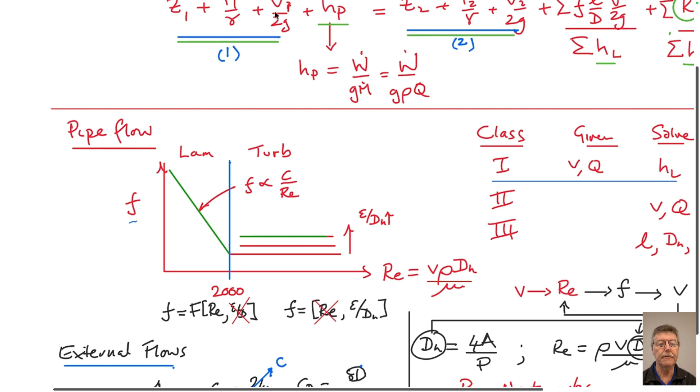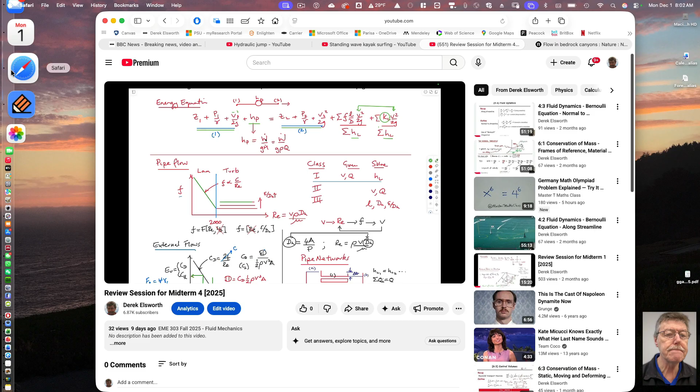All right, we were surfing West Virginia, and our very last topic—perhaps we can review things from the last little while—is open channel flows. The deal with open channel flows is that unlike pipe flows, which completely fill the section of the pipe and are constrained to that volume, and external flows, which completely envelope the structure they surround, open channel flows have one free parameter: the depth of the channel. That's the reason why, when we look at surfing West Virginia, you get this weird and wonderful behavior with these waves in the channel at very high flow rates.

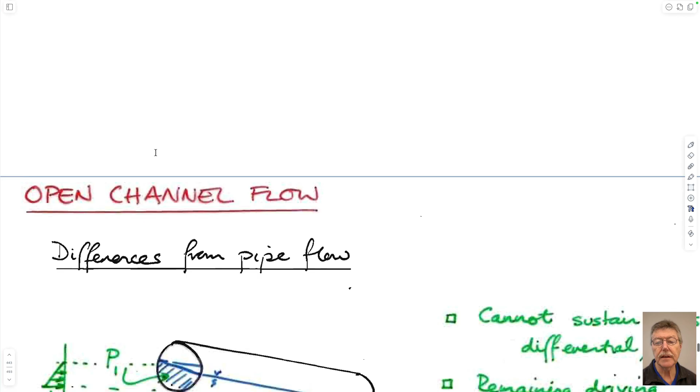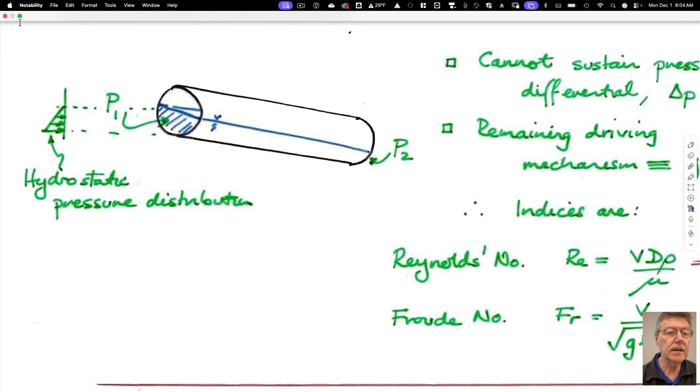If you don't constrain the flow to completely fill the cross section, then it could be a very shallow flow, flowing very quickly, or a very deep flow downstream, flowing very slowly. Why don't we look at that—this is the previous example here, this is exactly what this is.

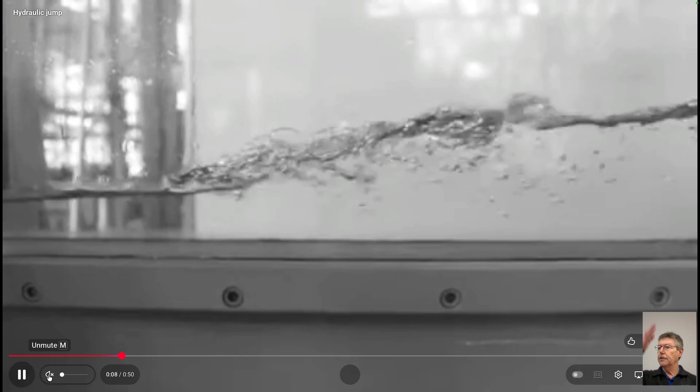A hydraulic jump is when it jumps from being exactly that. On the left-hand side, if you cut this anywhere along its length, the flow rate across that section has to be the same from continuity requirements—Q upstream has to equal Q downstream because it's not accumulating anywhere. So if you cut it upstream, it's a very shallow flow depth, a very small cross-sectional area. The velocity times area there has to equal the velocity times area downstream. So on the left it has to be flowing quickly, and on the right—let me check the orientation—it's flowing very slowly and at a deeper depth.

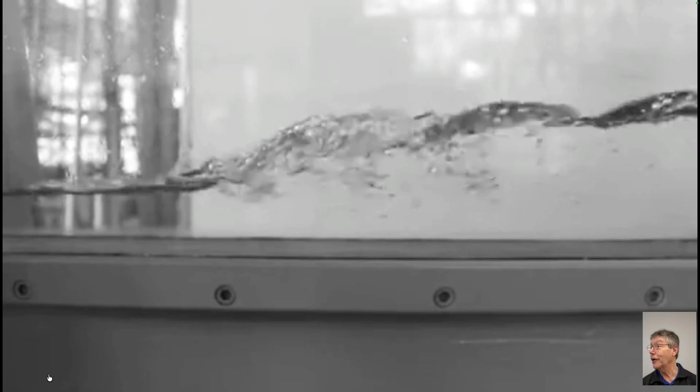That's the issue for open channel flows: you can have each of those modalities that the water gets to choose between. It can choose between going quickly at shallow depth, or more slowly at a deeper depth. That's some of what we'll talk about in this last week or so, the last 3 classes.

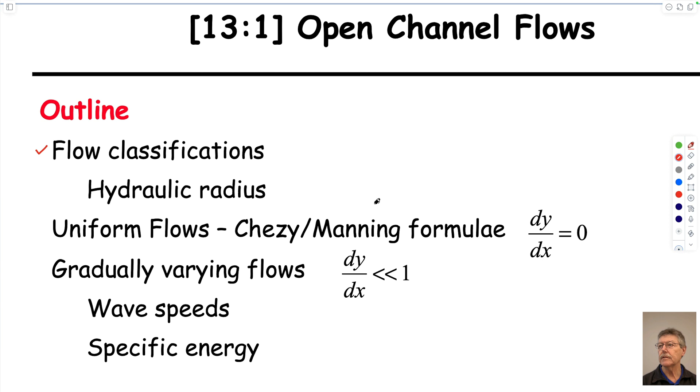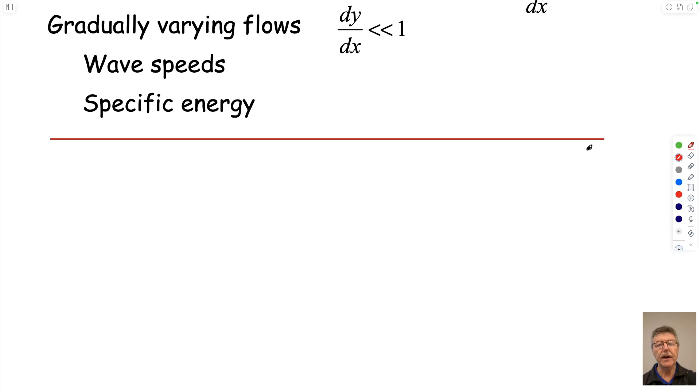But before we do that, let's catch our breath and look at what is the same in what we've done so far, for pipe flow. I'm going to draw something on the left-hand side which is tall, which you'll see—I'll pre-draw it perhaps. I'm going to draw something like this: our Moody charts, essentially.

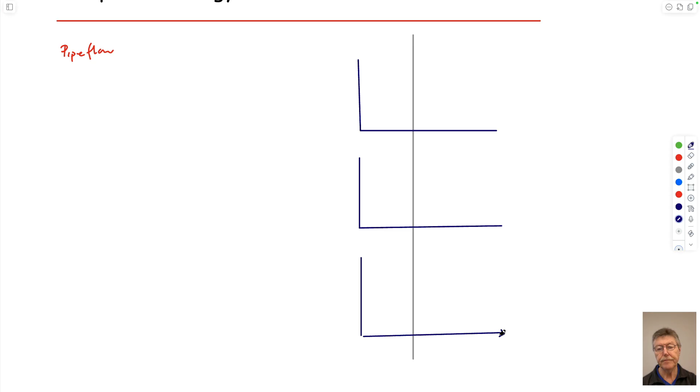I'm going to draw 3 of them: one for pipe flows, one for external flows, and then one for open channel flows, just to identify everything in the same space. This is the boundary between turbulent and laminar.

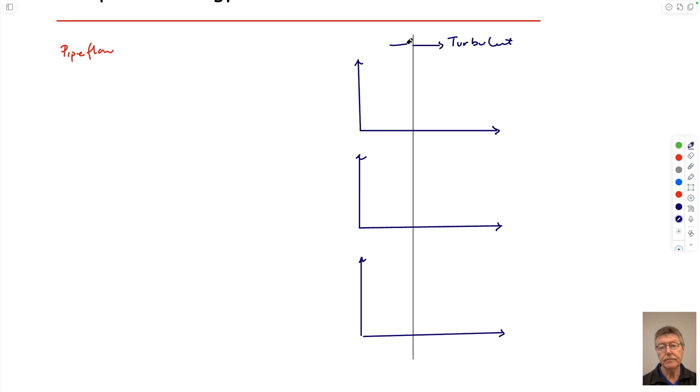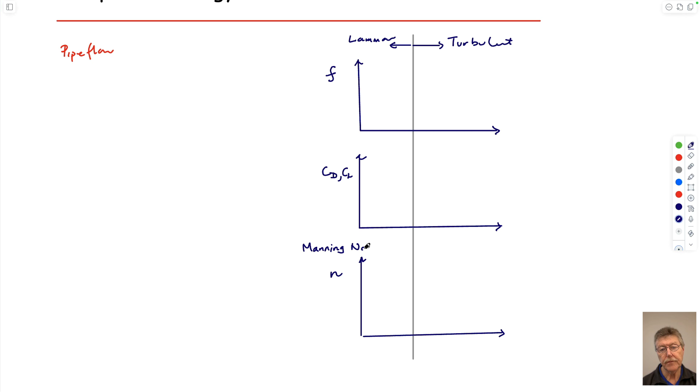How's my writing? This is friction factor. This is drag coefficient or lift coefficient. And this is Manning number, which we haven't talked about. This is Reynolds number in each case. We know that Reynolds number equals velocity times density times a characteristic dimension, the hydraulic diameter, divided by viscosity. It's the same for each of these.

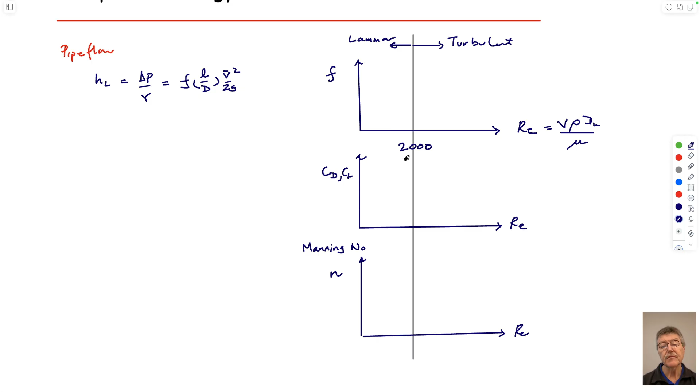We know that, for instance, HL equals delta P over gamma equals friction factor times length over diameter times V squared over 2G, where V is the average velocity. This is a Reynolds number of, say, 2,000 or 1,000. And we know that here, friction factor, I'll probably just draw it small, is equal to a constant divided by Reynolds number.

And these are for increasing values of relative roughness.

We know that in the laminar regime, friction factor is a function of Reynolds number but not roughness. And we know that in the turbulent regime, it's generally a function of roughness but not of Reynolds number, because these lines are horizontal.

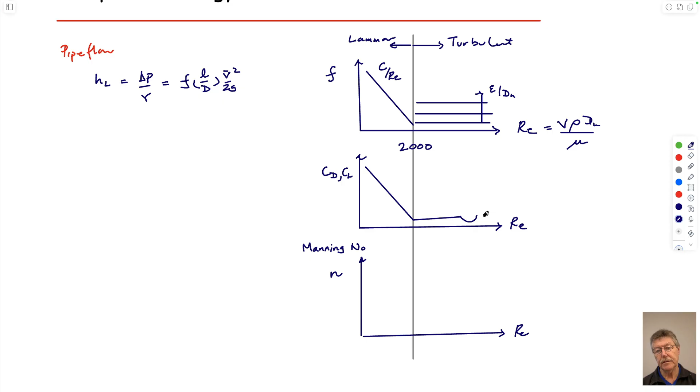You know that maybe for external flows, what if they looked like this, some of them have a little divot and then this. This has also been a constant over a Reynolds number, and this has just been a single value, say, for a sphere.

And we know that physically what these represent are different flow regimes. They look the best when we do them...

...for flow around objects, because this is the one where it hugs the object. And this is where you have the von Karman vortex street coming off the back, which is the reason the Tacoma Narrows bridge got pinged like a guitar string, as individual vortices are shed periodically from the top and bottom of the box girder. If it happens to be the resonant frequency of the bridge, then it pulls it apart.

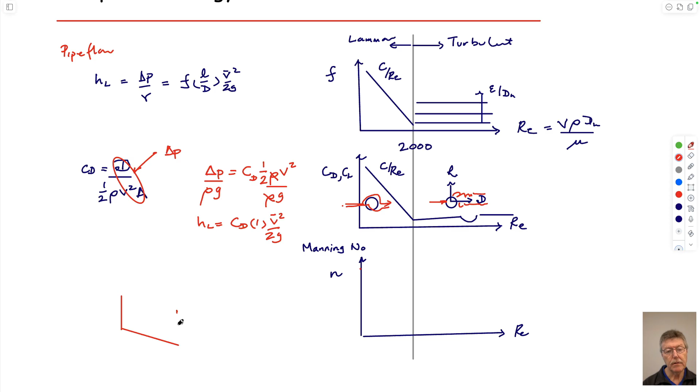And in this, as we'll see, we could imagine that for an open channel flow... see how my drawing is? No, it's not too bad, get the picture. Get perspective—it should narrow as you go down to the vanishing point.

And so this would be either a velocity or a volumetric flow rate. Doesn't really matter. And actually, we would think that we would have curves like this, again. So we could just do some experiments in different flumes to look at what the behavior is.

And we'd find out—what was this? This was maybe 10 to the -2 and 10 to the -1? I think this was 10 to the 0, and this was 10 to the -1, just in terms of ranges of these parameters. And I think this is also 10 to the -2, 10 to the -1.

This is the so-called Manning coefficient, and these would be for increasing channel roughness—kind of a surrogate for epsilon over hydraulic diameter. So this is relative roughness as it gets rougher and rougher. So these are pipes that look like this, these are pipes that look like this, and this is the locus of all the smooth components.

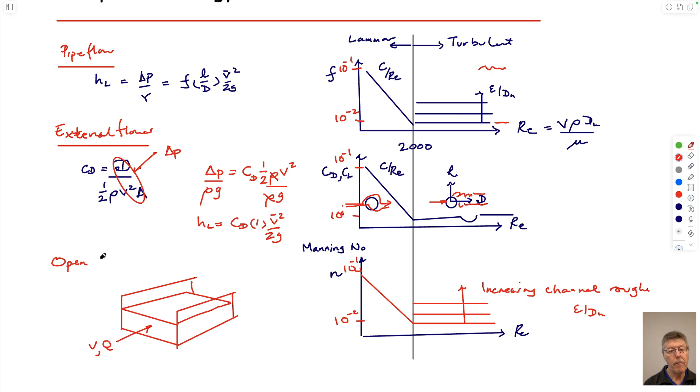So that puts them in the same frame. If we were always guaranteed to have pipe flows which were in the turbulent regime, then we'd only need these components. It turns out that for open channel flows, because the Reynolds numbers are always large, almost always they'll be turbulent, and almost always we can classify them in terms of a single number for weedy, grass-filled, concrete-lined, etc. There'd be a single number that we can use.

So in some respects they're always on the right-hand side of this line. That's not the case for either external flows or pipe flows. We can't make that supposition. But almost always it turns out that for open channel flows, we're on the right side of this line, turbulent. And so we can deal with it as this.

That puts everything we'll talk about for this part of the class, and actually since class 10 - weeks 10, 11 were pipe flows, 12 external flows, and 13 is this. So for 4 weeks, it really conforms to this behavior.

You've seen this before. I'm not going to leave it up super long, so you can write it down. The same thing.

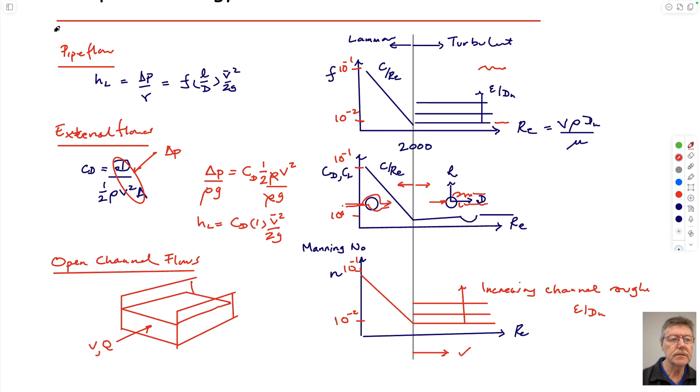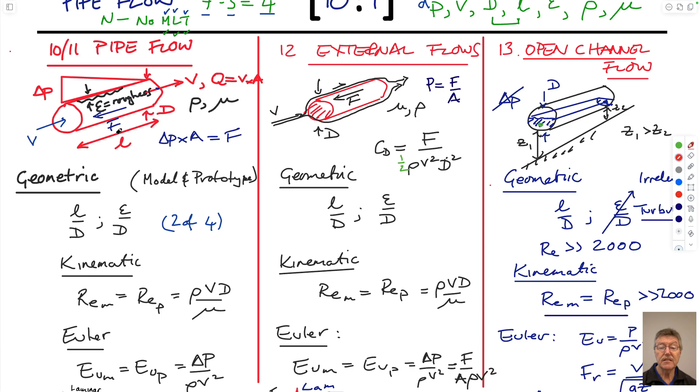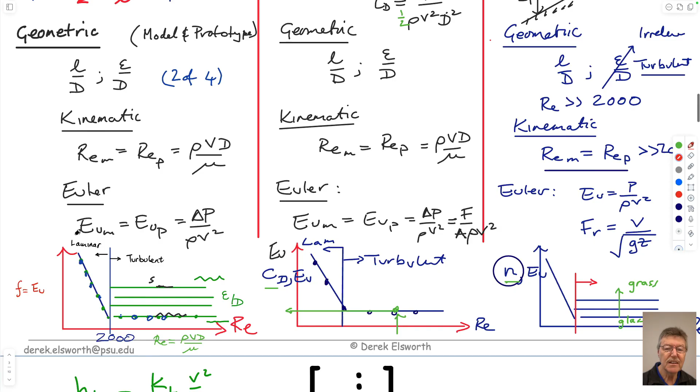Yeah, you've seen this. This is the same kind of summary, a bit messy, but if you look at pipe flows, external flows, and open channel flows, the differences are just - well, you can evaluate them in terms of dimensional analysis, and you can look at how many parameters describe the flows, and you can come up with the relationships that describe these behaviors. And the bottom line is that these Moody charts, the coefficient of drag or coefficient of lift charts, and the Manning charts all conform to the same thing.

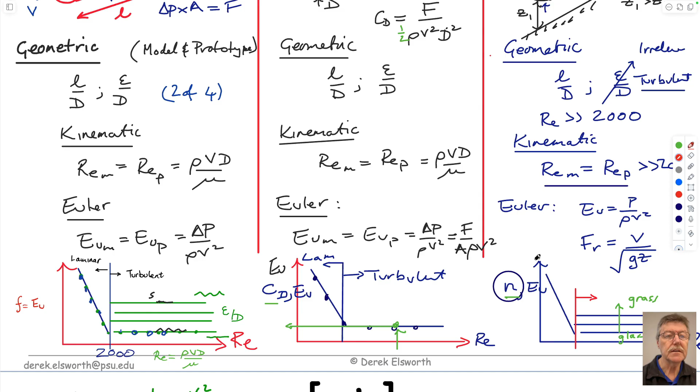The only thing about the Manning charts is that we're working on the right-hand side, turbulent, sort of turbulent flow. So that's a figure that kind of explains what we just drew out and you just have. So that's what we will do today.

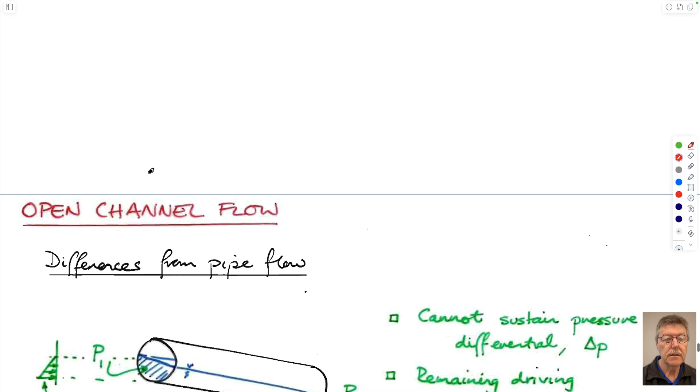So what makes open channel flows open channel flows? I'll use the notes just because I have them. So of course you can have an open channel flow in a pipe.

The main component is that rather than driving it by an upstream pressure and a downstream pressure, it has to be driven only by gravity. So all its driving flow is the self-weight of the fluid that wants to get from high potential upstream to lower potential downstream. Even if you fill the cross-section of this pipe, and if you had, say, the water level at this level here, and the outlet water level at this with a tiny little air gap, that would really be gravity flow. The idea is that you can't really sustain an upstream pressure and a downstream pressure because it'll short circuit in the air above it with very low viscosity.

So it's only being driven by the elevation of the surface of the water, which might mimic the elevation of the pipe, or it might not. So you could imagine that this free surface of the water would have exactly the same slope as the base of the pipe, or it might not. And so those are the different flows that we'll talk about. So driven only by gravity.

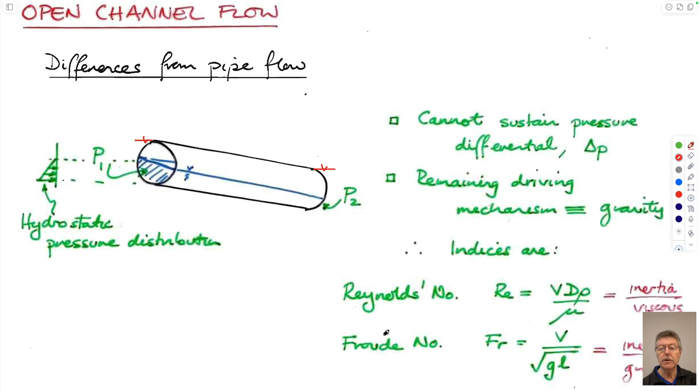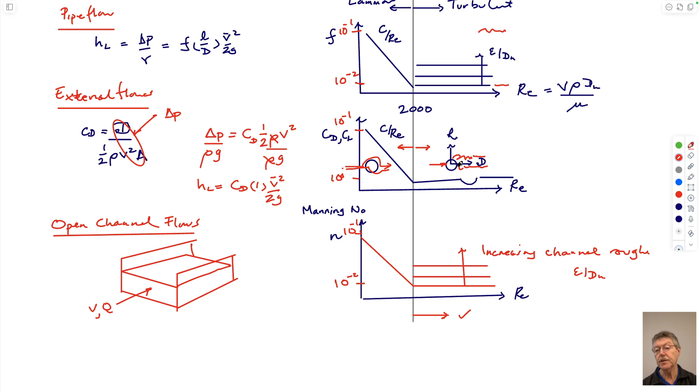We know that to maintain the same regime, as we talked about here, this regime versus this regime, we index it versus Reynolds number. And we've said that we can do that here. It turns out that there's also another number that is important for us, the so-called Froude number.

Can never work out how to pronounce it, Froude or Froude, don't know. But just like Reynolds number is the ratio of inertial forces to viscous forces, the Froude number is inertial forces to gravity. And so you've seen it before. It's if you set the Froude number equal to 1, and this is the velocity of a wave, the velocity celerity wave is equal to sqrt(g z).

You've seen this before. So in other words, if this Froude number is equal to 1, and this is the depth of the water - so if this is the water, this is the wave that's traveling in that water. This is just kind of an interesting relationship. This is just how deep the water is - 10 feet deep in a swimming pool, 1 kilometer deep in the ocean.

This is the speed that the tsunami wave goes at, which we probably did in the first class online. Peng Liang took the first ones, right? So this is the ratio of inertial forces to gravity.

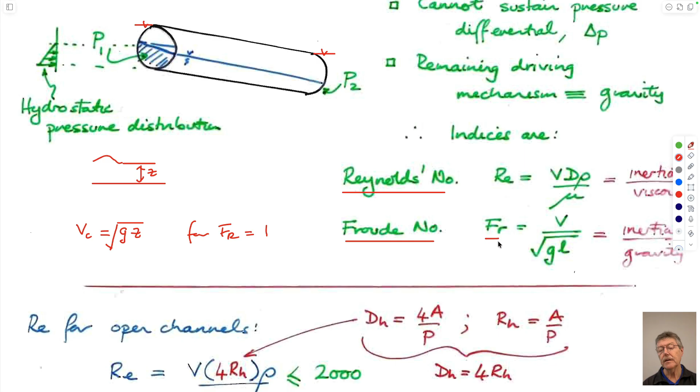It's an important number for us, only important when we're talking about gradually or rapidly varying flows, because it's the rate at which you can signal upstream. If you have a hydraulic jump, water going at some fast speed then jumping into this plume downstream and going more slowly, the only way information can go upstream from that point is by a signal at the velocity of the celerity wave. So if the water flow is faster than this wave speed, you can never communicate upstream.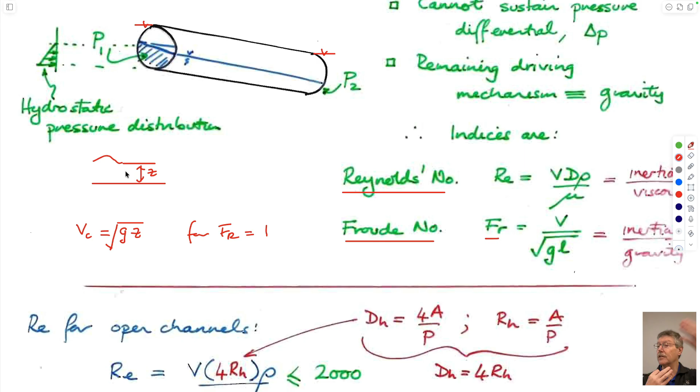I suppose it's like shouting into the wind. If the wind coming into your face is going at the speed of sound, 600 miles an hour, no one will ever hear you upstream because it will never go against it. If it's going at 0, they'll hear you. If it's going at half the speed of sound, they'll hear you delayed by a lot. If it's going at the speed of sound, it will never get away from you. That's the rub there.

The other thing about open channel flows is that the Reynolds numbers happen to be large, so we're almost always turbulent. We've used before the hydraulic radius, hydraulic diameter, which is 4 times the wetted area divided by the perimeter. In open channel flows, by definition, we'll use the hydraulic radius, which is the area over the perimeter.

I've never quite understood this. If you use the hydraulic diameter, 4 times pi d squared over 4, divided by pi d, you cancel terms and you're left with the hydraulic diameter for a circular section, where the area and the perimeter give just d. For this other shape, you don't get that. The area, if you imagine it filling up a circle, would be pi d squared upon 4, and the perimeter would be 2 pi r, or pi d, which equals d over 4 once you do all the substitutions. Hence, for some reason, the hydraulic diameter is defined as 4 times the hydraulic radius, rather than 2 as in the regular case.

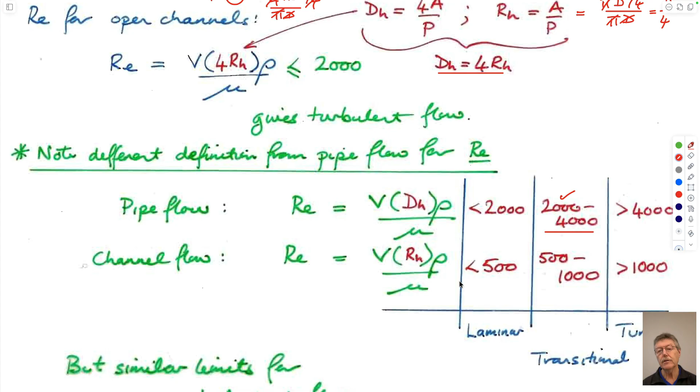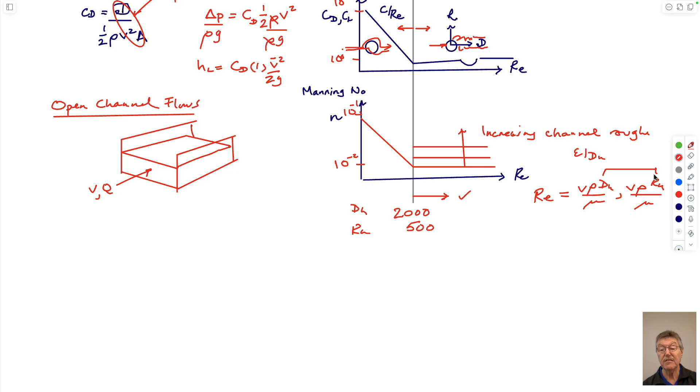The corollary for pipe flow and channel flows is that if you do the calculations for the transitional Reynolds number, where we go from laminar to turbulent, maybe at 2000, and classify it in terms of hydraulic radius on the bottom axis of our charts, the Reynolds number could be velocity times density times dH, or velocity times density times RH — it's up to us to choose. All our classifications would be based on that. So if this is defined in terms of hydraulic diameter, the transition is 2000. But if it's defined in terms of hydraulic radius, it's actually 500, because of the relationship between hydraulic radius and hydraulic diameter. That's what this little chart is pointing out.

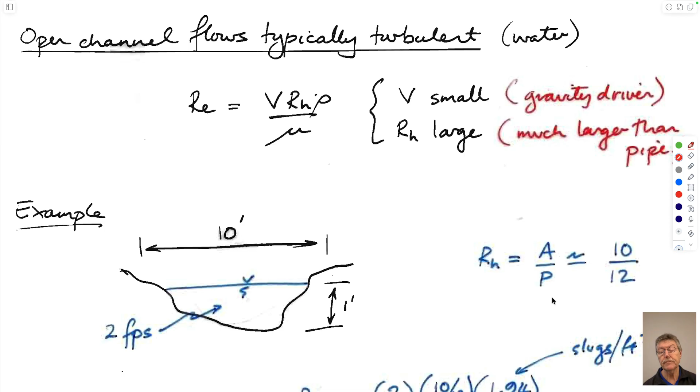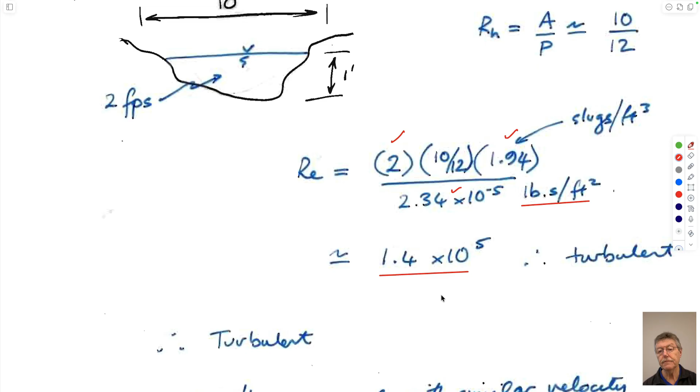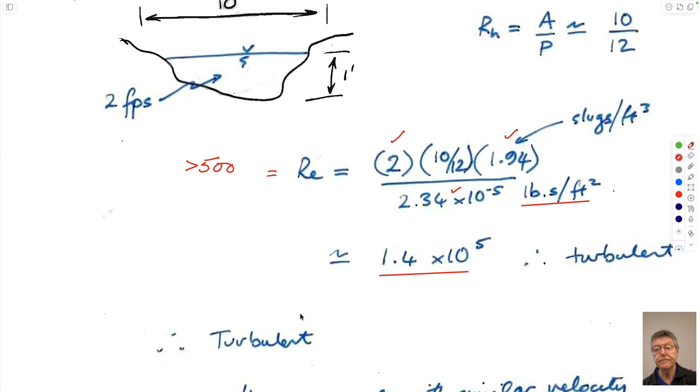It turns out that for any numbers representing a channel, because channels are quite big, you're always above that number. Just imagine a ditch or a stream, 10 feet wide, 1 foot deep. The area is 10 feet by 1, the perimeter is 1 foot plus 10 foot plus 1 foot, giving a hydraulic radius of almost 1. Multiply that by a Reynolds number if we're going at 2 feet a second, using the density and viscosity of water in English units — the Reynolds number is dimensionless. We want this to be greater than 500, and 1.4 times 10 to the 5 is much greater than 5 times 10 to the 2. So in almost all cases we can assume the flow is turbulent.

So then the classifications come to bear as to what we expect. Imagine flow from a pond downstream across a weir — weirs are used to measure the height of the water above the weir, which we can convert into a flow rate. The higher the water depth above a weir, the higher the flow rate, classified according to Bernoulli's equation and some variants on that. We can define different series of flows, and the simplest one is uniform flow, where the upstream depth is equal to the downstream depth of that segment.

What's uniform is that the depth of the flow is uniform. We can think of this as a depth y, either as a vertical depth or as a depth perpendicular to the bed. It doesn't much matter because these angles are so small - the slope of the bed is quite small compared to the horizontal. So it doesn't really matter whether we define it as a vertical height or as a normal-to-the-bed dimension height. They're pretty much the same.

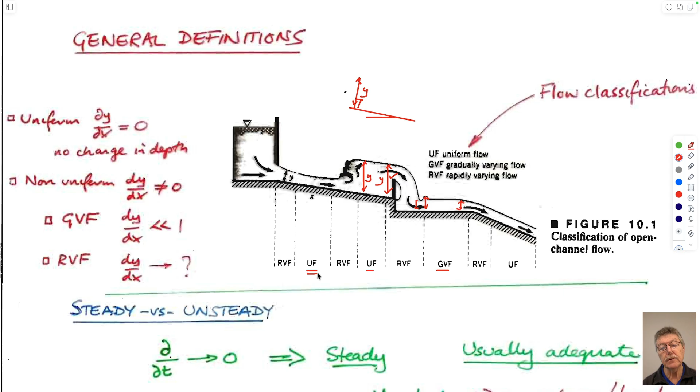So what we'll do today is talk about only the simplest of those, which are uniform flows. And the other classification is we'll talk only about steady flows - we won't talk about flows where it's varying in time.

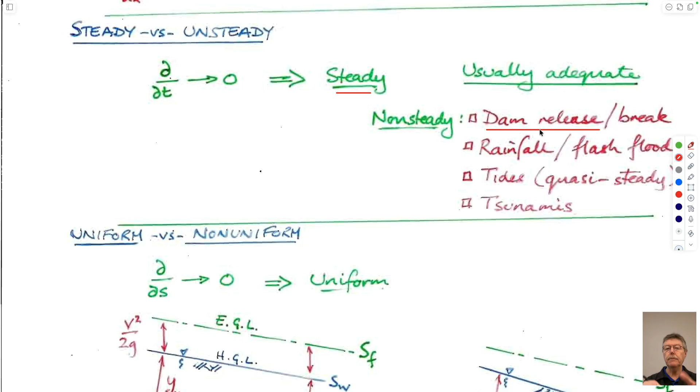We looked at the Malpasset Dam. When the dam breaks and it all flows downstream, that's not steady state because you start off with no flow downstream and you end up with some flow downstream that must ultimately stop. So some of these cases are not steady state, but that's not really our point here.

For today, what we'll deal with are these uniform flows. That means that as you go from upstream to downstream, you have a bed which varies with some slope. So this would be L.

S0 is equal to delta Z over L - so it's just the gradient, like the gradient on a road: 1%, 2%, 10%. And so this is the slope of the bed.

We know that we can draw in Bernoulli, right? This would be Z upstream, this would be Z downstream. If these Y's were actually vertical rather than angled normal to the bed, then this would be the pressure head acting at this point. This point here would be the total head, so H would be equal to YU plus ZU.

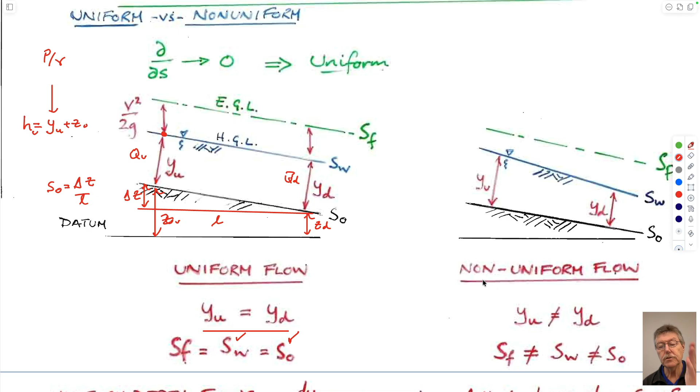So this is the simplest case. If upstream and downstream flow depths are not the same, then they can all be different from each other - those are non-uniform flows, either gradually varying or rapidly varying flows, which you have to deal with. So the case we'll deal with today is this.

If you take a section along the length of it and draw a cross section, A prime, or AA in this case, this would look like this. If it's a segment, it can't go infinitely wide in this dimension here. It's got to have boundaries to it. And so it would look like this.

If we look at that section, then we have wetted perimeter, which we've called P. And I guess we have an area of flow, which we've called A. Those are the things we need to worry about. Let's not worry about that for now, we can come to that later.

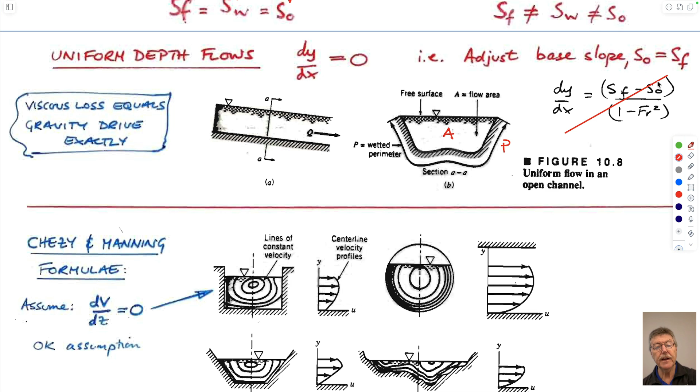If we look at the section and contour the velocity, you could imagine that if you drop a stick into the stream close to the bank, it will travel less quickly than if in the middle of the stream. That is because on the edges you have this viscous drag, or actually, it's like viscous drag because it's turbulent. We've said it's always going to be turbulent, this interaction, so it's going to be like a boundary layer. But you could imagine this would be a contour of small velocity going downstream into the page, and the fastest velocity would be this circle in the middle. If you looked at a section, it would be kind of zero velocity here, but perhaps not quite zero because there's a very thin boundary layer which is there.

If you drew a vertical profile or a plan view profile, and looked in plan view at the velocity versus location, it would look like this, and symmetric on the other side. So the maximum velocity in the middle, zero velocity at the edges. This is plan view. None of these are plan views.

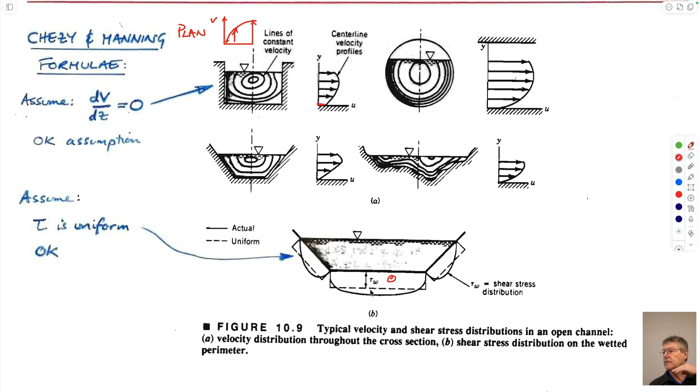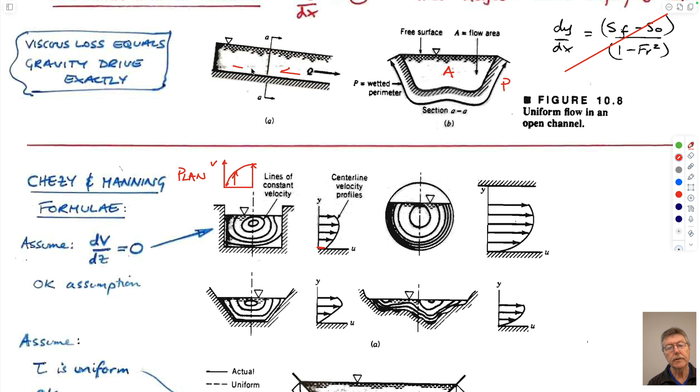And likewise for this. So around this boundary, there is very low velocity, perhaps zero velocity in all of these cases at the ultimate depth of the channel. Also at the channel wall as you go around it, this would be a maximum velocity in the middle, zero velocity at the edge, just here. As a result, you're applying a shear stress, not acting perpendicular to the boundary, but acting downstream. This shear stress would be acting, coming out of the page at us, along this boundary. In other words, it would be acting in this direction here, all the way along here, providing drag against this motion.

And so the bottom line is that we can do a simple force balance, not too much math today. So we can write a momentum balance, which you might remember: sum of forces is equal to velocity times mass flow rate. Remember this equation? So sum of forces acting downstream.

So we take a block. This is our block, which is upstream, downstream. We cut it off. We look at the force which is applied on the upstream, and the force which is applied on the downstream. We look at the momentum going into it by the velocity going into that cut off volume upstream, and the velocity coming out downstream. We could look at a shear stress. This is equal to shear stress tau acting on the bottom, if you can't see this. And we can do a mass balance.

If we look at the sum of the forces, and we don't look at these ones on the base, then this would be the mass flow rate, and this is the velocity, so these two. We're resolving downstream. And so by definition, if the upstream and downstream velocities are the same, they have to be, because we're making them the same depth. So if V2 and V1 are the same, the right-hand side is equal to 0. If the right-hand side is equal to 0, then the forces are equal to 0. Good, so that's one first step we can make.

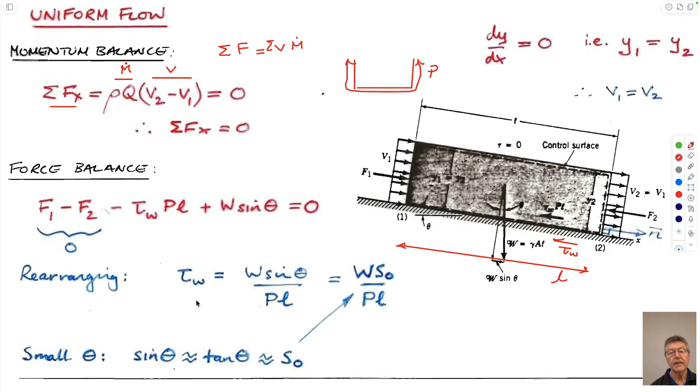And so we can get rid of these two terms because we've shown that they equal 0 right here. We're left just with that the shear stress is equal to, this is the shear force that's acting, shear stress times perimeter times length. This is an area.

Not divided by. And this is the component of the force acting downstream, the weight of the water and its component in the direction of the flow, which is W sine theta. And so these have to equal 0. So in other words, tau W is equal to W sine theta over PL, which is this.

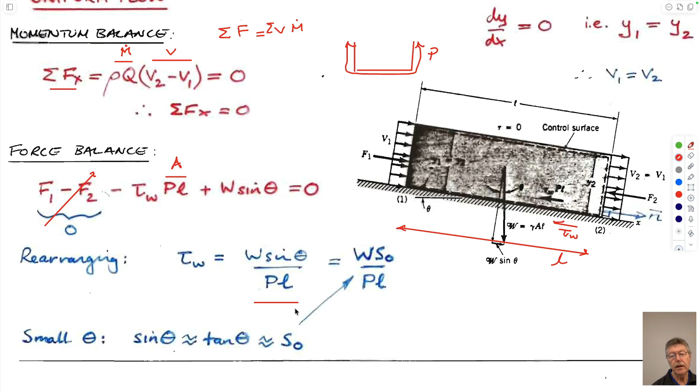If we realize that sine theta is a very small angle, so this angle here is the same as this angle here, and it's also equal to what we've defined as S0. In our previous slide, we had length, we have delta Z, and we had this magnitude was equal to S0, which is exactly what this is. So for very small angles, this is equal to just this gradient. Both tan and sine equal just the magnitude of 1 foot divided by 1,400 feet, whatever the relative magnitudes are. So we can convert this value here to just S0, and we're left with this.

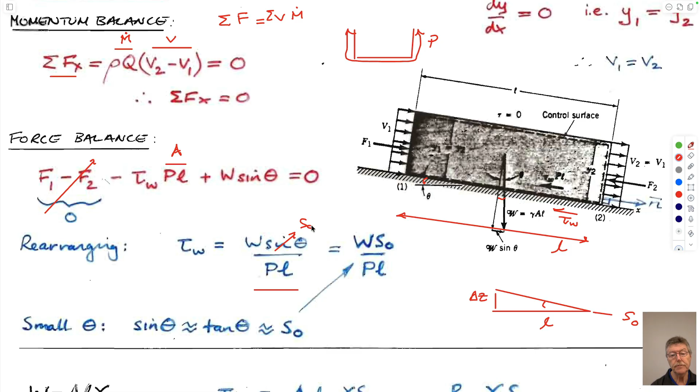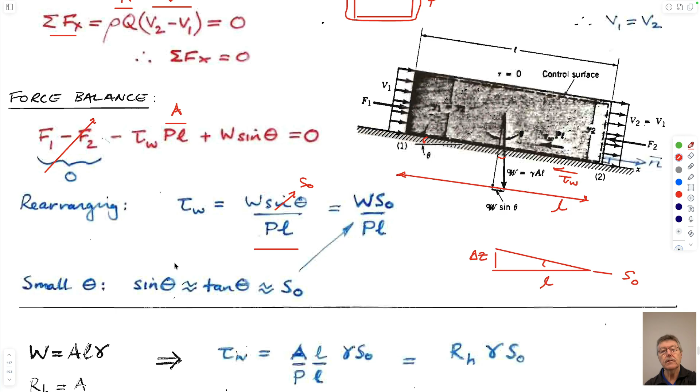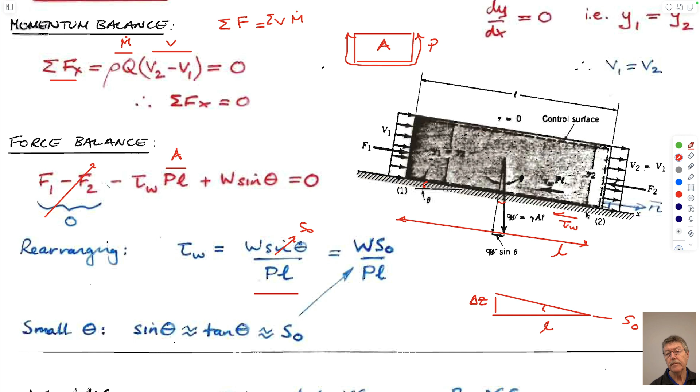So what else do we need to do? We have this defined here. We know that the weight is going to be equal to the cross-sectional area, looking down here, times its length, times its unit weight. So the cross-sectional area times the length, this is the volume of the fluid that's in that channel. This is its unit weight, and so we can just substitute for this value here. And so that would be this term here. Area times length, this. We're not doing anything else.

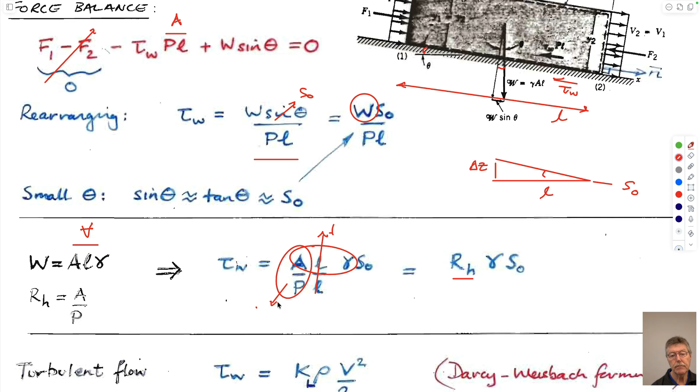And so by definition, since the length over the length, this is equal to 1. Area over perimeter is just equal to our definition of hydraulic radius. So we have this expression here. So we know that the shear stress that's acting on the bottom of the bed is equal to hydraulic radius, the unit weight of the water, which we can get, and the slope, which we can get from the bed.

If we want to define it in terms of the head loss in the system, you remember that we could write head loss is equal to loss coefficient times v squared over 2g. Remember, these were major losses, or minor losses. These are losses in fittings. This is equal to delta P over gamma. This is the head loss in a fitting. It's a coefficient which can be a maximum of 1 usually, and the velocity of flow in the fitting as it goes into it.

So this is this. This is a variant on this. This is just describing the shear stress that's applied on the panel. This is the same as... delta area times delta P. So if you imagine a pressure difference between upstream and downstream as delta P, the area times that pressure difference is the imbalanced force between upstream and downstream.

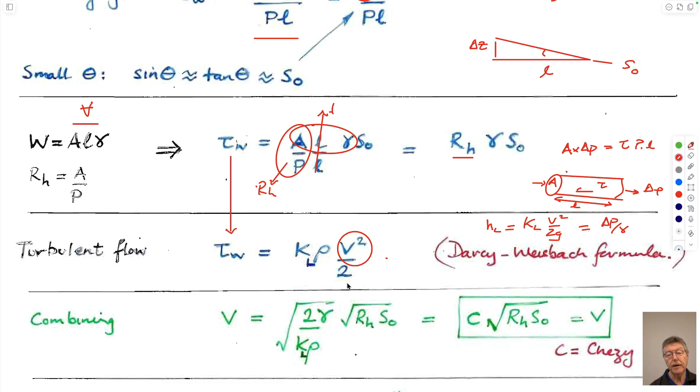And if we can equate this to this, then we end up finally, if we solve for the value of the velocity in the flowing stream, just by rearranging this after making this substitution, this is what we end up with. Take square roots of both sides, and velocity is equal to some kind of constant multiplied by hydraulic radius and the slope of the bed.

So we can write it as this, the so-called Chezy formula, after a French fluid mechanician, I guess. This is a constant, and this is the other term. It turns out that this constant isn't actually a constant. If you do some experiments in a flume to measure it, like you could do for measuring the friction factors in pipes, it turns out that it's not a constant, but a function of the hydraulic radius to the 1/6 divided by a roughness coefficient. This is termed the Manning coefficient.

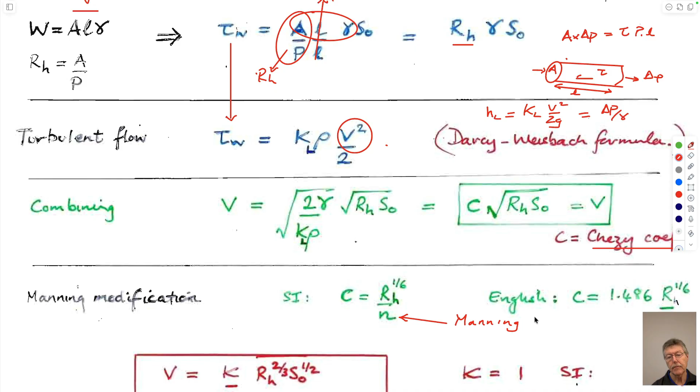After, I guess, an Irish fluid mechanician...

This says something about the friction factor for a channel. It turns out that this constant isn't independent of the terms in this equation, so you have to accommodate this r to the power 1/6. So this equation, instead of being equal to c times RH to the half, S0 to the half, this term has to include the r to the 1/6. So instead of hydraulic radius to the 1/2, it's hydraulic radius to the 2/3. That's where the extra 1/6 comes in.

These are standard results that you can use. So to get the average velocity within the flowing system, you need the hydraulic radius of the pipe or the channel.

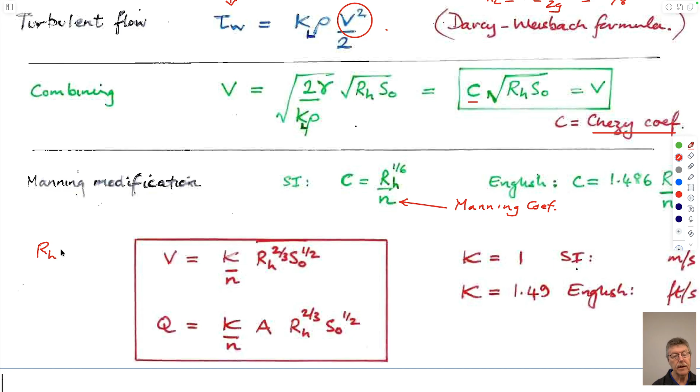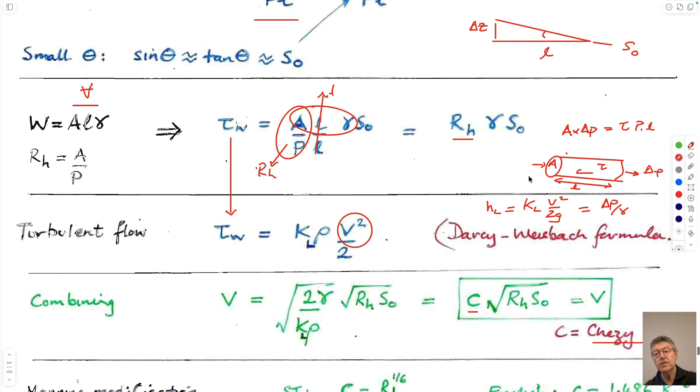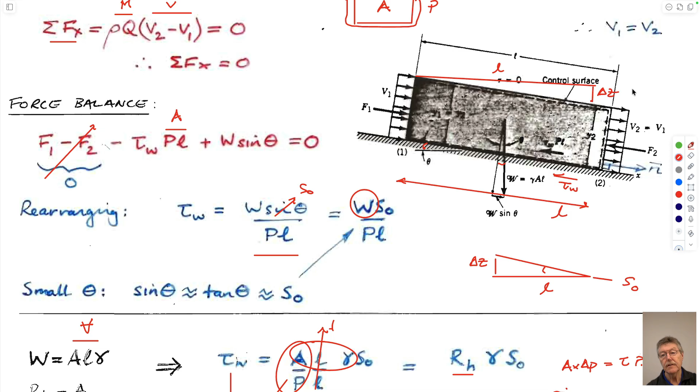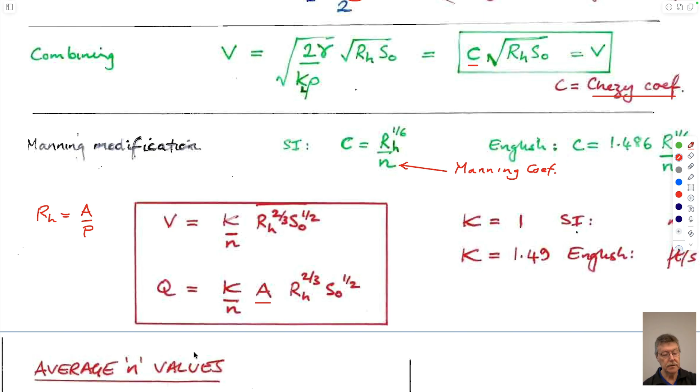If you want to get the volumetric flow rate, you multiply this by the cross-sectional area, and Bob's your uncle, as they say, that allows you to get the behavior. So that's it, for uniform flows it's very simple.

I guess we went through a bit more arduous derivation than I really wanted to, but the bottom line is you can get the velocity as a function of a coefficient, a Manning's coefficient, hydraulic radius, and the gradient of the bed. It turns out these aren't non-dimensional numbers. This is a length over time, but these units are not length over time. So you have to, if you're using SI units, use meters per second, which we would use. In that case, this coefficient kappa turns out to be 1. If you use English units, you have to use feet and seconds, in which case kappa turns out to be 1.49.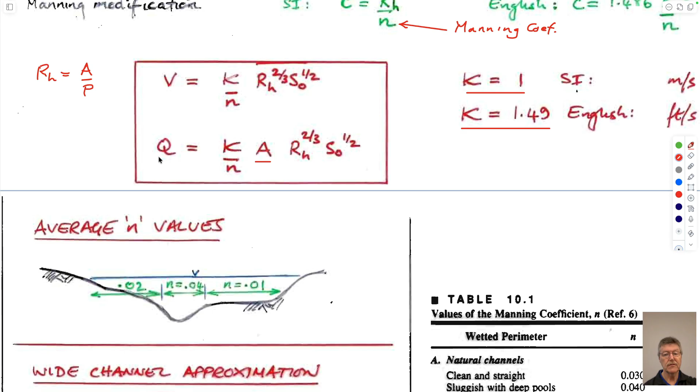Three minutes to go. Well, let's do it, it's not very difficult. These are the expressions you need to use if you're calculating what the velocities or the volumetric flow rates would be.

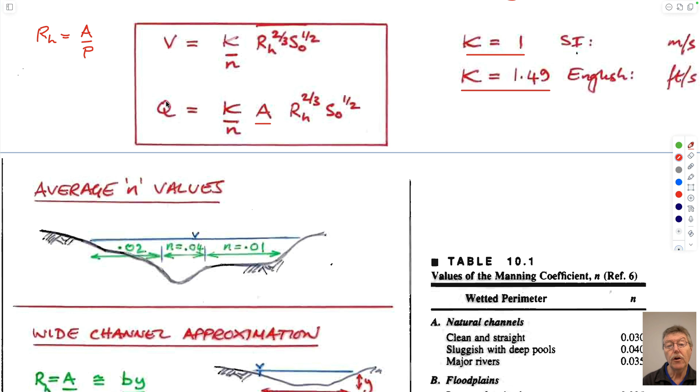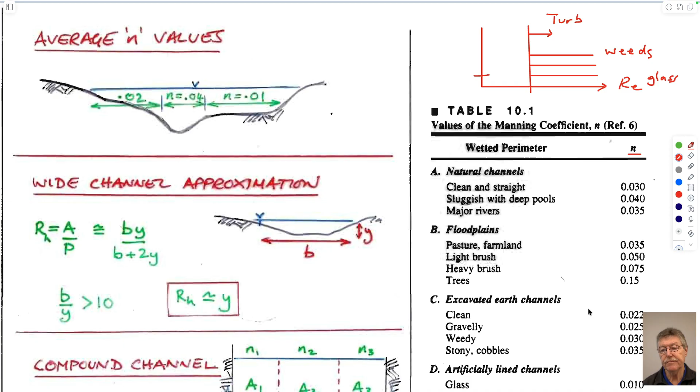If you look at realistic channels, these are values of this Manning's number. You remember we described them before as being on the Moody chart, this was laminar and turbulent, and this was turbulent, this was Reynolds number. So these would be values - this would be weeds, this would be glass. These numbers go from, what's glass, 0.01, to weeds, 0.03.

You never need to draw it like this, of course, but this just rationalizes it relative to the Moody chart - as the channel sides get rougher, going from glass to weeds, the magnitude of these Manning's coefficients change. Light brush is if it's going through trees, I guess, heavy brush also through trees, so this would be brush, and would be much larger.

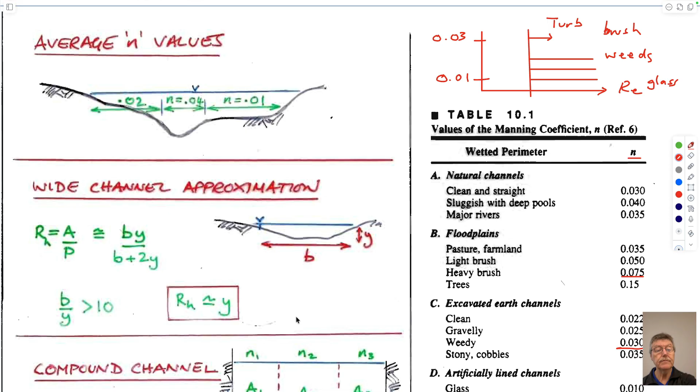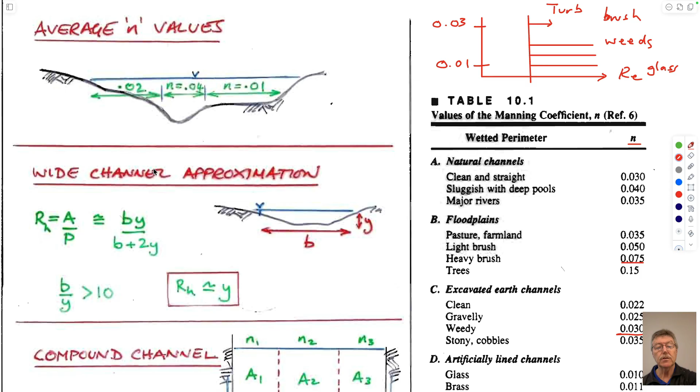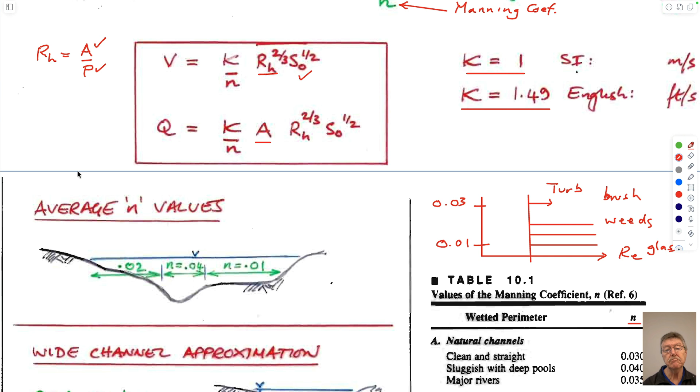And so if you have a channel - well, let's start there next time. If your channel, you can calculate all these things. You know what the channel base is going at, you can calculate that elevation drop in a given length, so you have a value of S0. If you know how deep the flow is, you immediately have a hydraulic radius because you know the cross-sectional area of flow and its perimeter. And if you know what the channel is made of in terms of how rough it is, you have this. It just becomes a straightforward calculation to do that. So let's rejoin that next time.